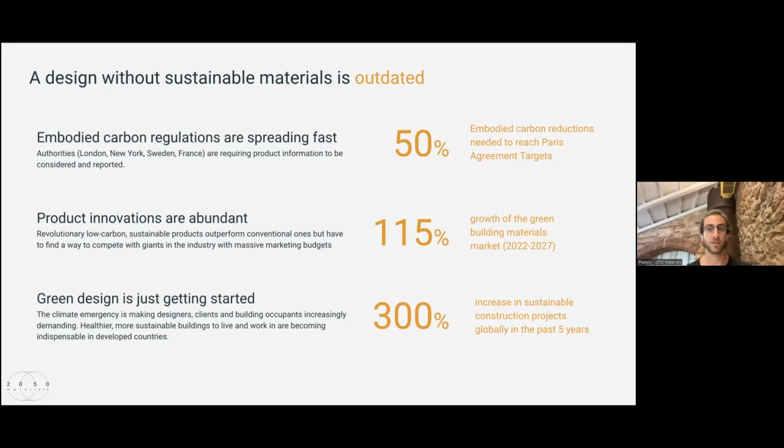And then finally, what falls under the umbrella of green design, in my view, is just getting started. In a lot of conversations we have with designers or architectural offices, from small ones all the way to global ones, it seems like most clients are at the very least starting conversations around sustainability now, and in a lot of cases setting very specific targets that need to be met.

Now, unfortunately, as I'm sure you already know, sustainability is not an easy topic to tackle. There's 1,000,001 questions probably that we can ask when we talk about sustainable materials, and the information, as far as we've seen, is sort of spread all around the internet.

Let's just assume I'm trying to understand the sustainability of 5 different bricks. So there's a few steps. The first thing is you have to look for any sort of environmental certifications for each product, and you also usually have to access the manufacturer's website for that information.

Now, once you get access to certifications like EPDs, environmental product declarations, or any other certification from ISO certifications to health product declarations, or anything else the manufacturer might have created, you start collecting some of that information.

At the same time, through the website, you usually send a lot of requests, and the requests can sometimes be linked to things like the cost of the product or any additional information. But often, unfortunately, a lot of these assessments, like an environmental product declaration, even though it might exist, it's not always easily accessible. So often there's a lot of back and forth with manufacturers to get that information.

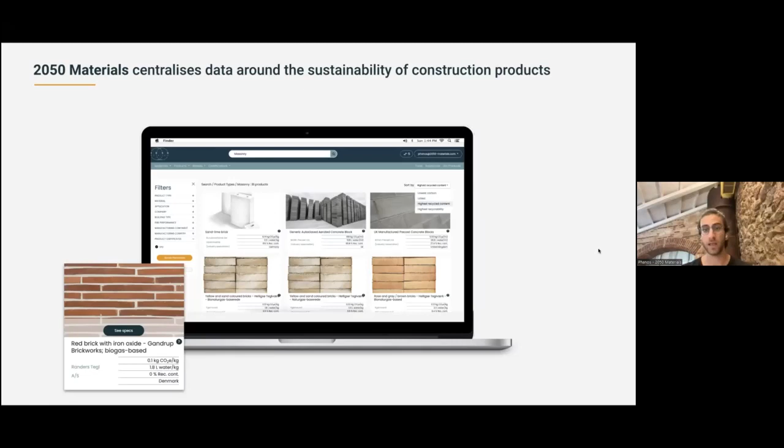Now, what we really aim for is to get the manufacturers to become more transparent. And that's because we think that a sector that actually goes to net zero, to zero emissions and zero impact towards the planet, needs to have collaboration. And part of that collaboration comes from the people and the companies who create all of these materials.

So a lot of what we do is we empower the manufacturers that are already creating a lot of data, or have a lot of data on their products, to put it out there in a format that is easily accessible and easily understandable by the designers.

And the end goal behind all this is, if you have the question of what is the most sustainable brick that I can find in my area, you could do a quick search of masonry or bricks on our platform, filter according to the manufacturing region so something that's close to your project site, and then compare products and generate an assessment that includes a holistic list of metrics around the sustainability of that product.

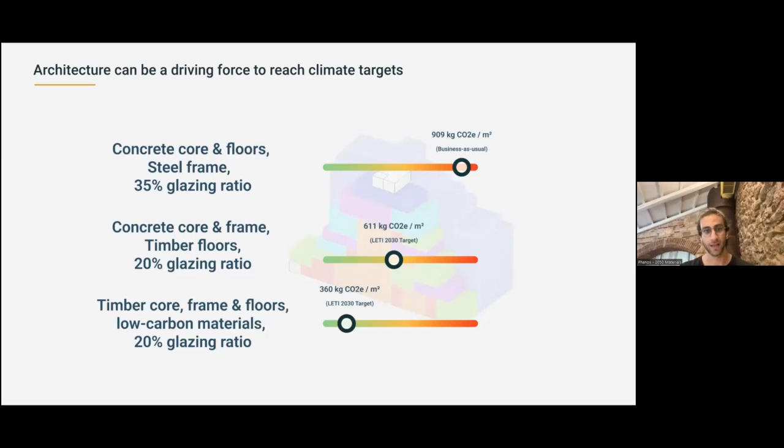Now I want to finish my talk on a positive note. I think there's a lot of negativity being heard around the construction sector, and especially architects are feeling the pressure because they know their work is contributing to a big extent to climate change. Personally, I think architecture can really be a driving force to reach climate targets, and competitions like the one happening by INTBAU are great because they show that net zero and low impact buildings are actually possible. The screenshot here is from an example of a way we've helped an office deliver a building in Berlin that's aligned with the 2030 target - not even today's targets, but something we're aiming to achieve in the future.

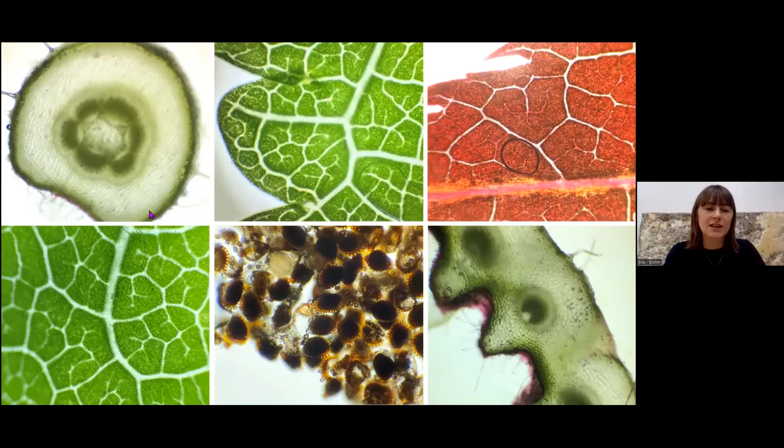One organism that's not only inspired us, but that we also employ, is fungi. We work more specifically with mycelium, which is the vegetative part of the fungus - it's the root structure that lives beneath the soil. Unlike the mushroom, which is the fruiting body and the part we eat, something you might recognize, mycelium is the network of tiny filaments that live beneath the soil. Mycelium can be found everywhere in the world, and it acts as a connective web that helps plants share nutrients and communicate with each other.

As it grows, mycelium forms small air pockets, which make the material a really great sound and heat insulator. For this reason, we've developed the technology into an insulation panel. Mycelium insulation panels outperform conventional products, and initial tests have shown a thermal conductivity value which is actually very competitive with market alternatives. We're in the final stages of getting this product accredited by BBA, the British Board of Agreement, at which point it will become commercially available and we'll begin full scale production of mycelium insulation in the UK.

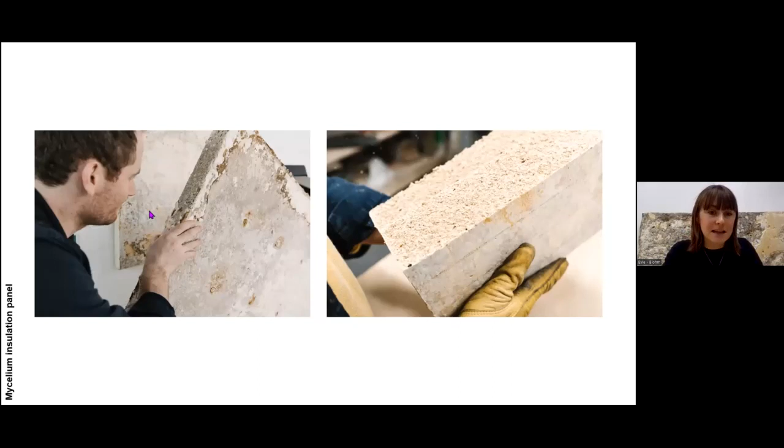Thanks to mycelium composite materials also having acoustic insulating properties, we developed an acoustic panel, Edge. This allowed us to bring the natural biophilic elements of the product into interior spaces rather than concealed behind walls and wall cavities. So not only are the panels visually interesting, but they also have positive effects on emotional and psychological well-being.

The other technology we've developed is ORB, which stands for Organic Refuse Biocompound. Our ORB technology is based off a unique plant-based binder which we've developed. This is a completely natural binder that glues together waste substrates. The substrates we tend to use are significant agricultural byproducts and food waste, all sourced locally. We've worked with orange peel from local juicers, coffee chaff from coffee roasters, sugarcane, cardboard, as well as other substrates, usually problematic waste streams that often don't have end-of-life solutions in place.

Our ORB technology gives birth to a whole range of innovative products with really unique properties that vary depending on the substrate that we put into the material. ORB materials can be used for dry cladding, interior architecture, as well as products and furniture design. We're also working towards developing an ORB construction board to replace the likes of MDF and plywood in the construction industry.

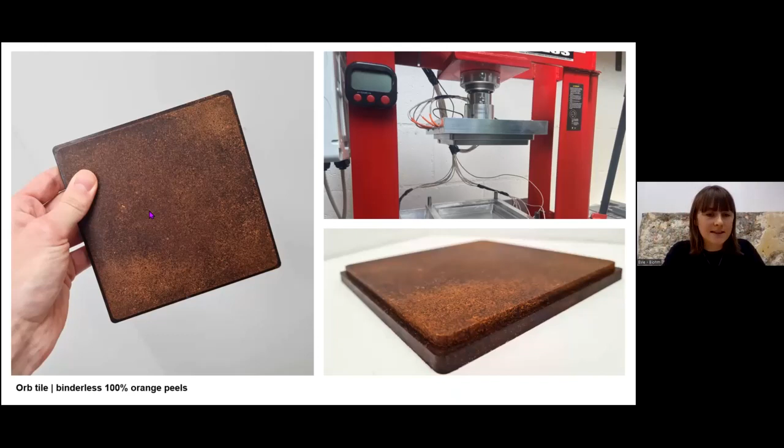We're also currently developing a tile which is made from 100% orange peel. This is our new ORB technology that doesn't use a binder, but actually uses the intrinsic binding properties of the waste to glue the matter together. This is a new product which is currently still in development, but we will hopefully be launching within the next year.

Like mycelium, ORB materials are completely natural and biodegradable. At the end of their lives, both ORB and mycelium can be cold composted and fed back into our manufacturing processes. By diverting the waste away from landfill, we're halting the degradation process which releases CO2 into the atmosphere, and instead trapping the carbon stored in that organic waste into a material. So our products and technologies allow companies we work with to deliver on their carbon targets and achieve their sustainable development goals.

We also help companies decarbonize through our services. As an R&D team with many years of experience using these technologies and developing innovative materials, we now can offer up our services to help companies transform their waste into novel materials using biotechnology.

One of our services is climate positive resource management, and this looks into different waste streams and tests the feasibility of incorporating these waste streams into either ORB or mycelium materials.

This was a project that we did with GS8 on Orford Road in North London, and we looked at the waste streams from a housing development project. We identified a few different waste streams, but one of them was the excavated soil from the site, and this was quite a problematic waste stream. So we tested the feasibility of incorporating it into our materials. We developed a soil ORB which had really interesting properties, including being a really strong material.

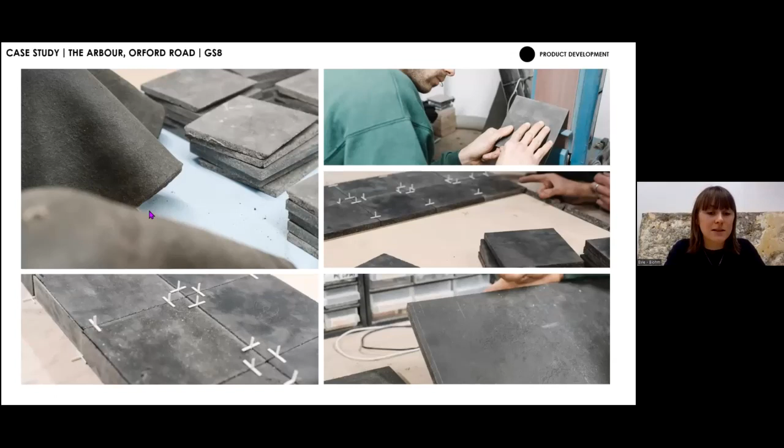Thanks to the material properties, we were able to develop a range of interior design products, which were then fed back into the homes that were built on this site. We made lampshades, some shelving and a headboard. This told a really nice circular story of bringing the waste from the construction site right back into the homes that were built, in the form of interior design products.

So thank you for listening, and I look forward to questions at the end.

Thanks, Evie, very much. A really fascinating introduction, I'm sure, for many of us to mycelium and also to some of the other products under development for Biohm.

Any design submission to the Architecture Challenge that also wants to get into the interior fit out is most welcome to do that, so there'll be lots of research and work that Biohm are doing that some might like to draw from. With your mention of biomimetics and biomimicry, I want to make clear that this ties into the core concept of the Architecture Challenge, which is learning from existing and evolving, time-tested building traditions that often have at their heart an inherent balance between people and nature. So a challenge to some of you entering is to think about how building traditions would adapt to incorporate brand new materials like mycelium. Hope to see some thinking on those, and thanks again, Evie.

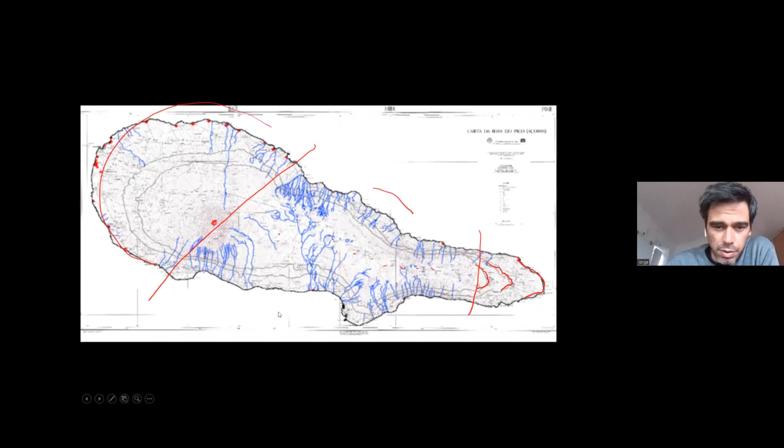The first thing that we discussed about in traditional architecture is the feeling of living in these traditional structures. So this is a sentence from Raul Brandão, a journalist in 1926, who states this feeling of darkness and this feeling of great grief and great desolation in everything that life in Pico Island was about.

One thing I want to share with you is that unlike all of the other traditional architectures we see around the world, Pico's traditional architecture is not based on the heritage of so many generations and millennia of adapting architecture to a specific climate or to specific materials found in the area.

It's a tradition that has a day one, through the movements of the Portuguese discoveries. And since that day one, the builders quickly adapted their traditional heritage from mainland Portugal or other places in Europe. When they arrived on the islands, they had to quickly adapt to the materials they had at hand because the supply chains were very limited at the time.

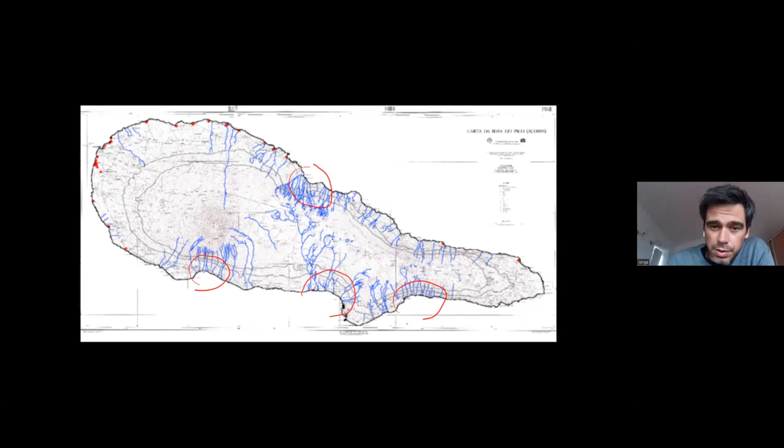With that in mind, the first settlers were looking for areas with a natural bay and water streams, rainwater streams coming down that they could use. The first structures were located in these areas, the canadas, perpendicular to the coast. As society developed, they also had coastal settlements, parallel to the coast, more recently. The canadas were perpendicular to the coast, concentrating all construction there to liberate the maximum area of soil for agriculture.

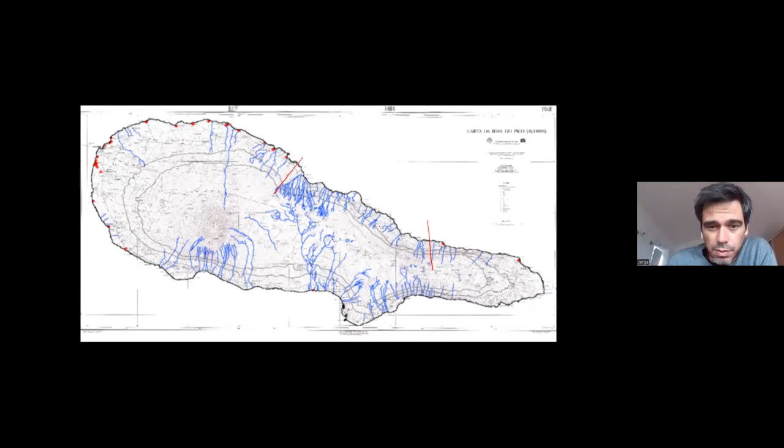These canadas were done mainly where you have big rainwater streams, trying to locate in areas where the topography is not too aggressive, so the soil is not washed away by heavy rainfalls.

The second way of settlement is coastal settlement. Unlike the canadas, where the people who worked the land were the owners, with very small properties, here we have very big vineyard properties through a new economy, the wine economy of the island. These settlements worked as industrial complexes, always backed by great fields of vineyards. The workers were no longer owners of the land, simply workers for someone else. These settlements would gather the vineyards, the grapes, transform them into wine, and ship it out to the other islands and the rest of the world.

This created very strong cultural landscapes where all the flat areas of the island were occupied with a mesh of small volcanic walls, about 1 meter high. These walls protect the grapes from the salty sea winds, and also capture the warmth of the sun to help the grapes mature.

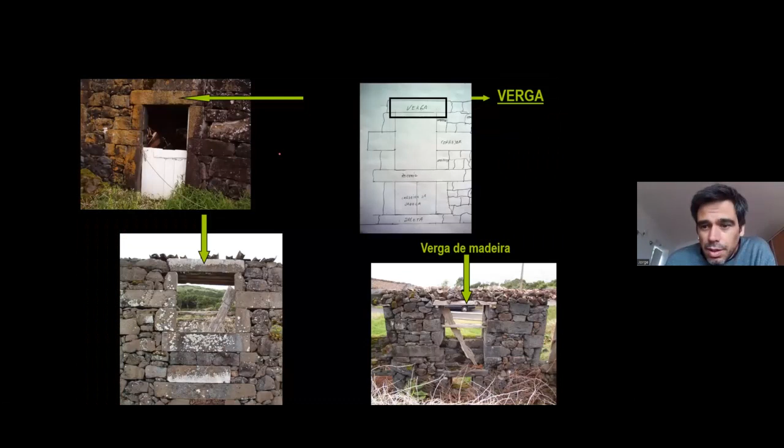Each of these stones are very noble. They have names: a verga, the umbreira. You see that even though you have this restraint, you have always a concern about symmetry, using stones with the same name in symmetry with the window or the door. This also has a structural element, helping resist seismic activities more.

You have a harmonic and balanced construction. And you can start to know how to read these constructions and define an idea of the social status of the builder or of the family that lived there.

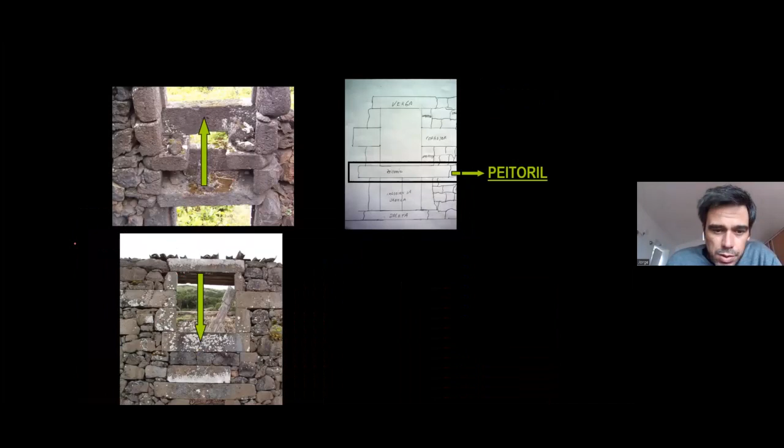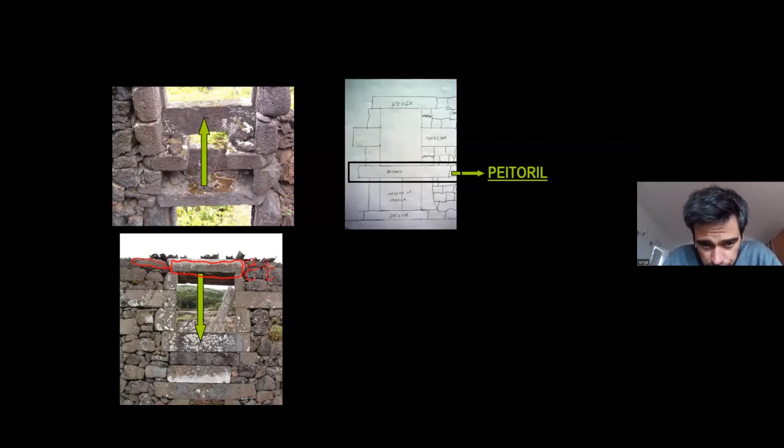So in comparison, here you have one very good line of well-cut stones to support the roof. If you see the last slide, you only have one well-cut stone. These are smaller stones, just picked up from the ground, so obviously this is a family with fewer resources than the other one.

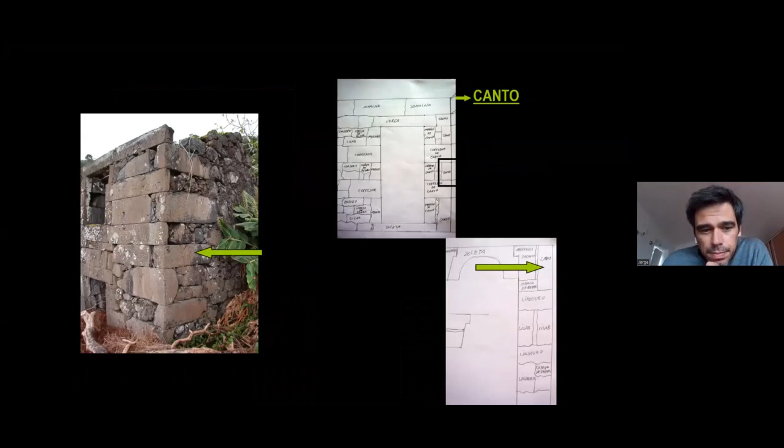This is also seen in the corners of the building. These are the materials used. These materials were imported, part of the supply chains brought in by boat, because there is no iron on the island.

Again, you need to adapt to this because you cannot just bring so many materials—it's a very expensive trip to bring materials and tools. So the builders at that time adapted their techniques and started to create wooden locks and wooden windows that do not require iron elements or mechanisms to function.

So this is a very fast forward introduction to Pico architecture. I think I can stop the presentation. Thank you, and looking forward to questions.

Thank you, George, very much. That was a hugely interesting look at the architecture of Pico, which I'm sure would have been unfamiliar to many here. It's also a reminder that building traditions can be, and so often are, the product of an absence of choice. Especially in wasteful parts of the world, globalization has allowed many of us to forget that the whole planet is like Pico—limited in terms of what there is to use, and how we must use it responsibly to build what we need.